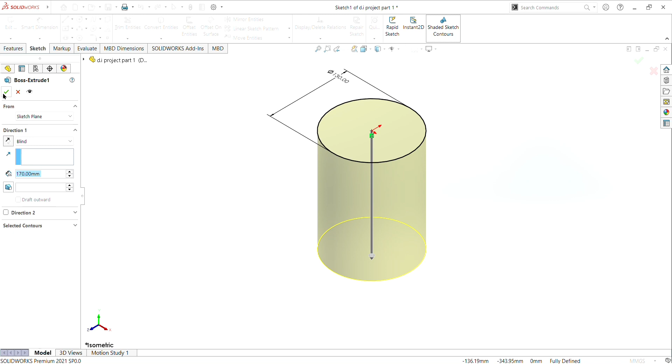So right now I'll be showing you how I made the first part of my project. So here, first I start with a sketch of a circle with a diameter of 130, and then I extrude boss, which I can show you here. Extrude boss to 170 mm, reverse, so that it will extrude boss downwards instead of upwards. The reason I did this is because I want it to be easier for me to make the shape of the cover. So basically, that's how I made the foundation.

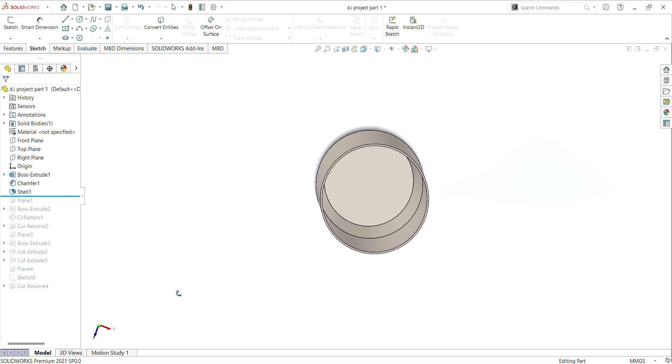After that, I chamfer it here. I chamfer it distance to distance: the first distance is 10 millimeter and the second is 40 millimeter. You can see it here. I chamfer it at the bottom instead of the top, so it will be like this. After that, nothing complicated. I move to shell, so I can make it hollow. The reason I make it hollow is so that I can insert other components inside here.

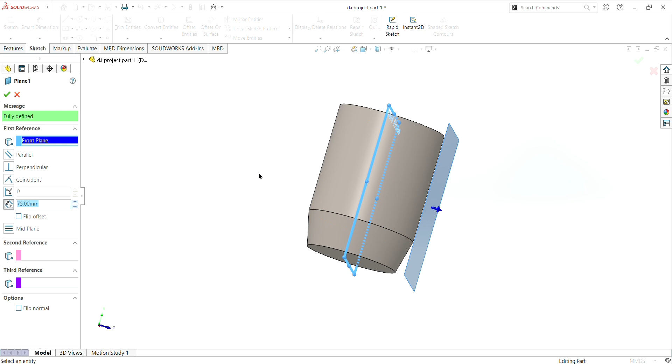After that, I make a plane which is 75 millimeter from my part, so I can make a component up here so it can be attached here. So here, what I did is from the plane that I picked just now, I extrude boss.

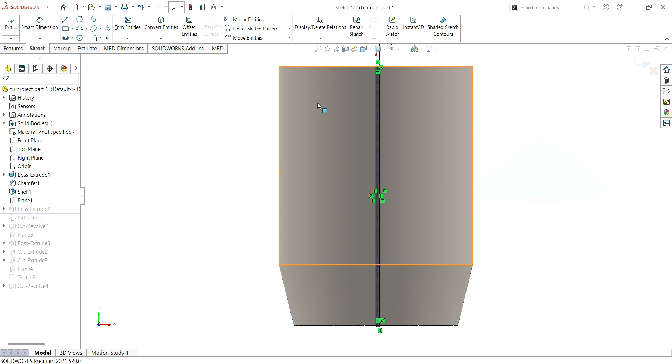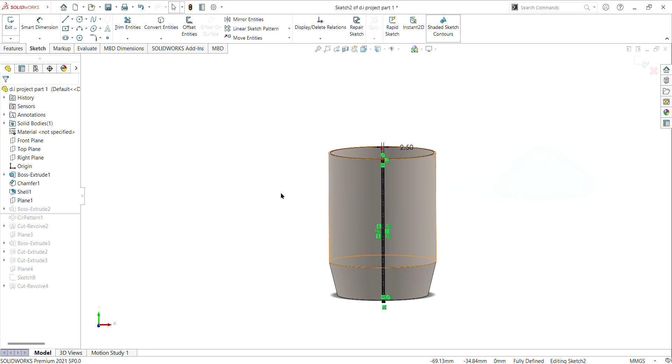I made a sketch here, which is 2.5 millimeter in length, and here, as you can see, I made a center line. From this center line, I can make it symmetrical so that it is equal from side to side. Then from this sketch, I can extrude boss it to make the fins.

Yeah, the fins. So from the fins here, I made it reverse and up to next, so that it extrudes boss downwards and it will not exceed my cover body. So it will just stop there. See? So this is the first fin, or the foundation of the fin.

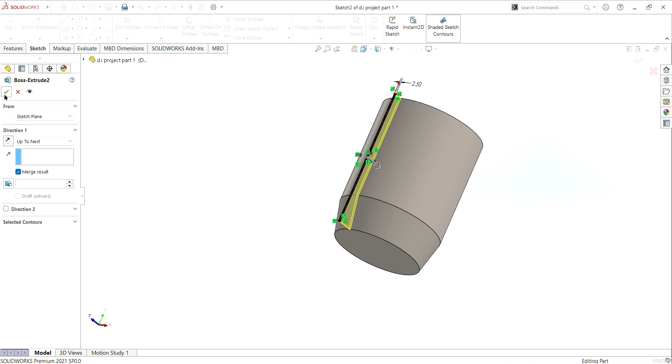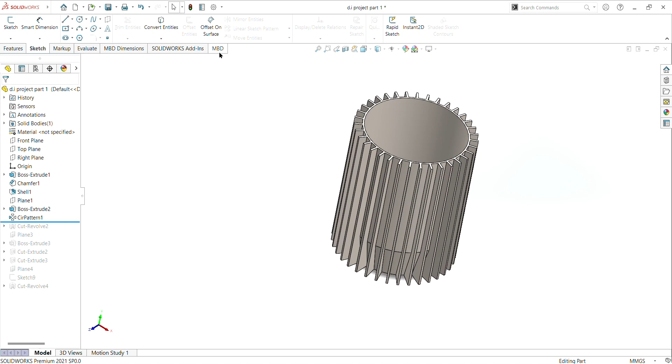As we all know, on an AC motor cover, the fins cover all of it. So how do I cover it? I use the circular pattern function here. Here I pick the face, which is my first sketch just now. Pick 360 degree, which means it will cover all of my outside cover. And the number 35 here is the number of fins covering my cover.

So from this pattern function, I can make my fins cover my cover in a circular pattern, since my AC motor cover is in a circular shape.

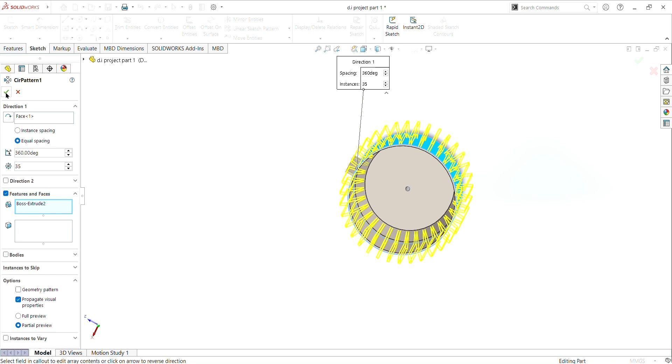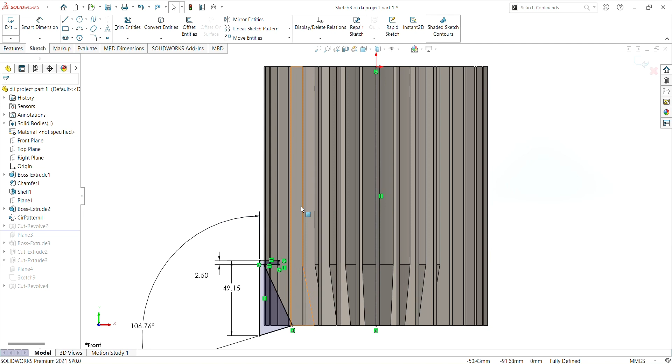After circular pattern, here, what I did is, as you can see here, it has a little bit of space here. So from this cut revolve here, I made a sketch at the bottom so that I can use this sketch to make a cut for the space that I want.

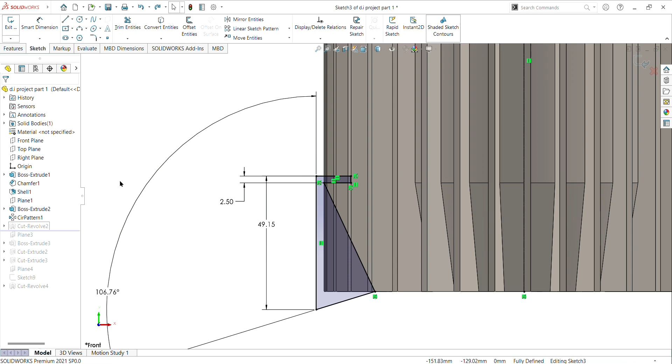I do not choose extrude cut, since extrude cut will only cut across, but I want it to be cut around my cover, so I choose revolve cut, where the cut will revolve around my object. So I choose the sketch, and obviously it will cut revolving around my object here.

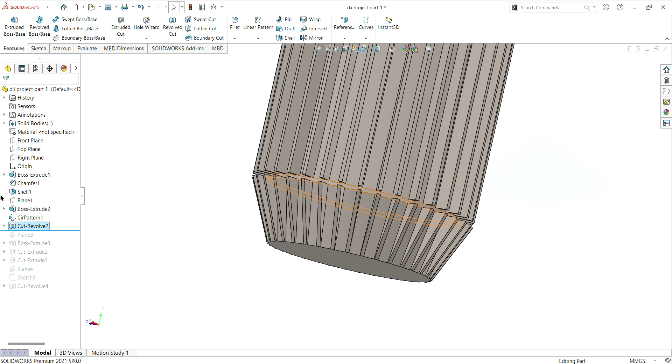After it has been done, uniquely, before this our fin, as you can see here, was straight in shape, but after we use the cut revolve function, it is perfectly shaped into a triangle, or we can say a right angle triangle. Perfectly shaped right angle triangle, with the perfect space that we want to shape the AC motor.

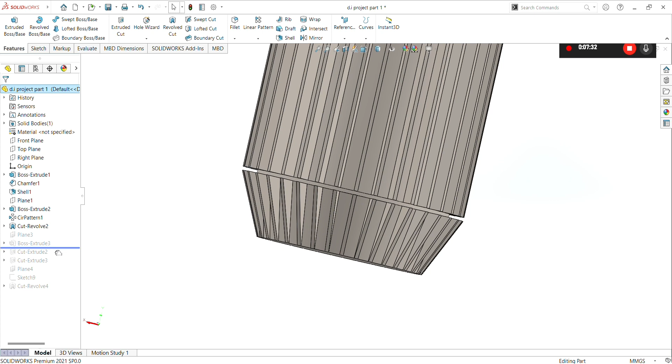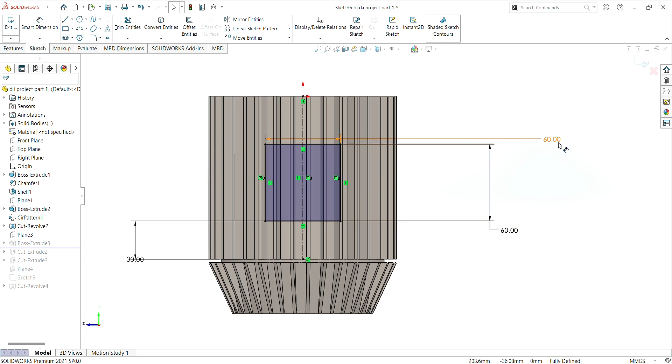After that, I move to this plane. I choose right plane, 100 millimeter, which is 10 cm from the origin, so that, same as the fin, I can make an object to be attached to the cover. Then here, boss extrude. As you can see, I sketch a square which is symmetrical with my cover. I made a center line so that it can be symmetrical. The square size is 60 mm by 60 mm.

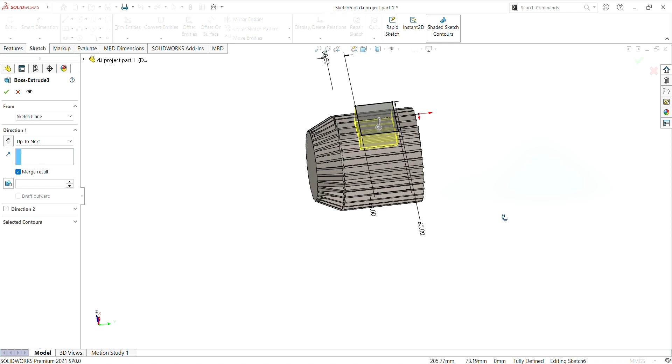Then from this square, I extrude boss it to make a box here. And same as just now, I extrude boss it reverse and up to next, so that it will be attached to this cover. See, it is attached here. After I extrude boss it, it becomes a perfectly attached box, where usually we can put an insulator so it can be tested when we do a test.

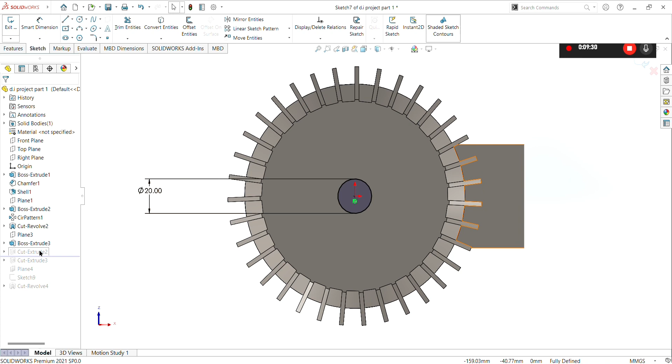So after I make a box, I extrude cut a hole here. The reason I extrude cut a hole here is to attach the motor in the next part. It's just a simple extrude cut to make a simple hole, and here another extrude cut to make a hole in this box. Just a simple extrude cut. Yeah, I extrude cut, sorry for the delay.

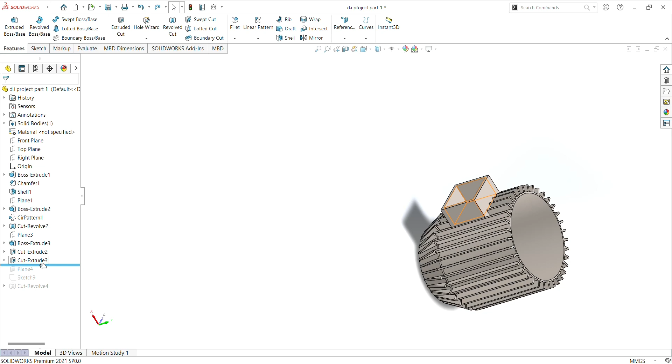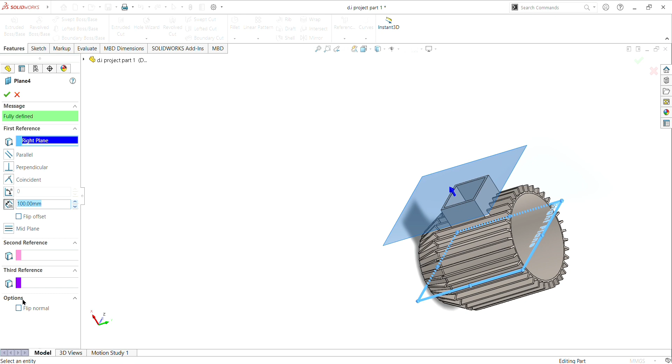Okay, after I extrude cut to make the hole, again I make a plane on top of the box. This plane, which is also a right plane and 100mm from the origin.

Here I made a sketch here, as you can see. Oh no, I'm sorry. Here, yeah, here. Here I made, as you can see here, I made a sketch here. I guess this plane is a bit of a blunder, sorry. Okay, in this, I choose right plane and made a sketch here, as you can see.

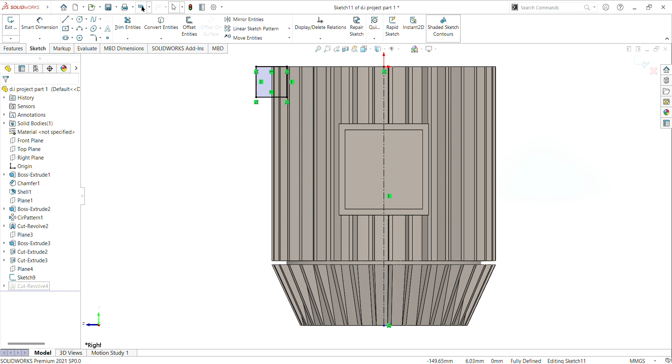This sketch here is 20mm and 20mm in length. I don't specify the width, I guess, because this sketch is for me to revolve cut, just like just now. I want the cut to be revolving around my cover. As you can see here.

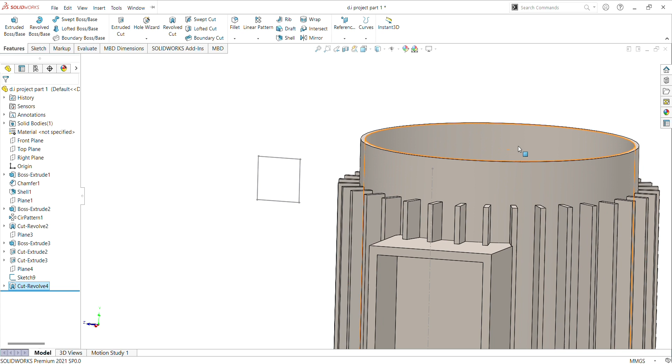The reason I did this is because it acts as a space for me to attach my back cover at this motor to complete the full body of the AC motor. So I guess that's all for the first part. So let's move on to the second part.

Okay. Alright, so this is my second part for my project. As you can see here, this is my back cover for my AC motor. So let me walk you through this. First, I sketch a circle with a diameter of 150. After I sketch it, I extrude boss it 85mm in height. I don't do it in reverse or anything, just a simple extrude boss.

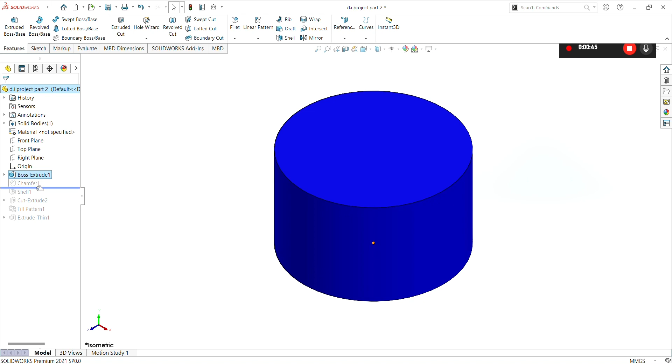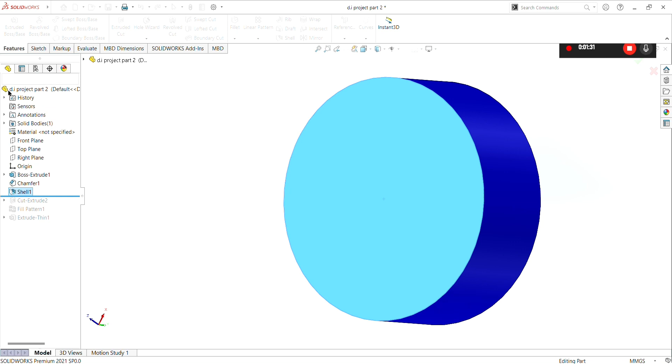After I extrude boss it, I move to chamfer. I chamfer it at the top, distance to distance, the first distance is 20mm and the second distance is 25mm. After I made my chamfer, I move to shell. I made a shell at the bottom of my cover so that it can be hollow, and as it is hollow, I can attach it to my body cover, and this is my back cover.

After I make it hollow, I make an extrude cut here, which is a simple square, 5mm in length and 5mm in width. This is the foundation for me to make a fill pattern. I made it first at the center. I made my sketch and I extrude cut it. See, I extrude cut it up through all just to be safe, so that it is hollow until the end.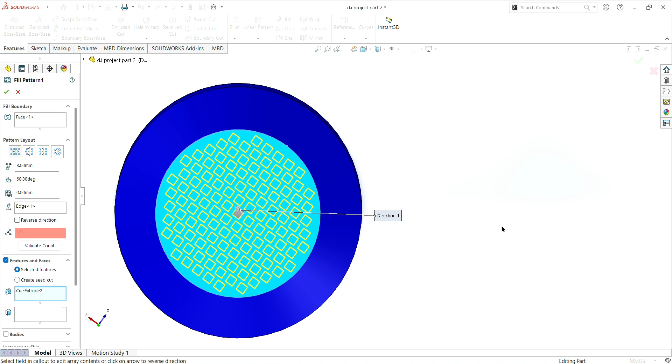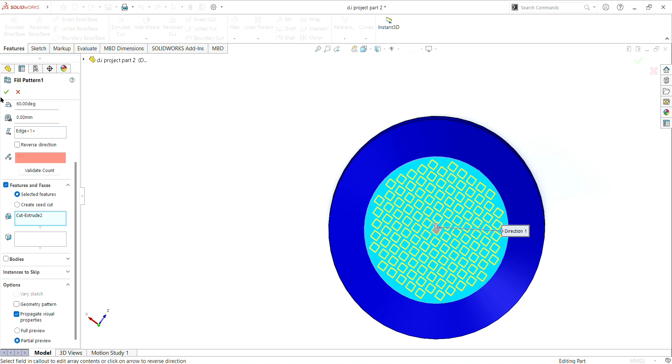Okay, after I cut it, I move to fill pattern. The reason I did it is because I want the square to fill every space here. I chamfer here, right? So the circle here, I want the square to be filled at this space. So I made it 60 degree, 8 millimeter and 60 degree, so the square can fill the back cover. So after I made it, it looked like this.

After I fill pattern, I made a sketch here. The reason I did a sketch here, 130 millimeter, is for me to extrude cut it. See, I extrude cut it, but I extrude cut it reverse and up to next. So I have a little bit of space here.

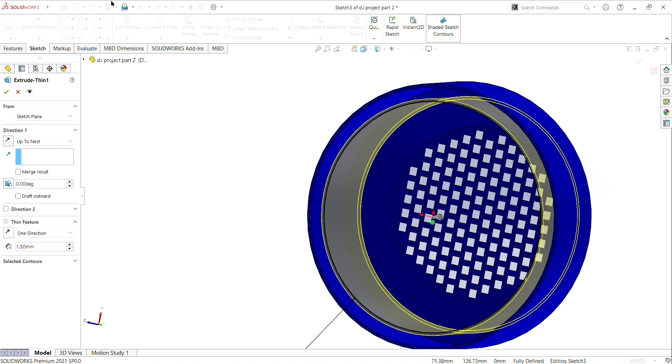My size just now is 150, and the next circle sketch is 130, and I extrude cut it reverse so that I can have a little bit of space here, which is 20 millimeter. This space is so that I can attach my back cover to my body cover. So that's all for my second part. Thank you. So let's move to the third part.

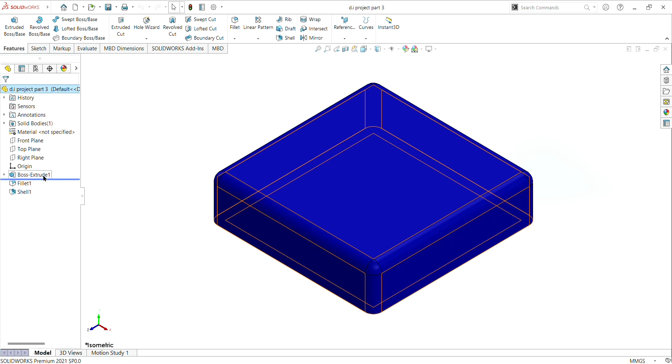So right now, let's move to the third part. There's nothing complicated here. It's a very simple square. It is the cover at my body where we attach the insulator. So here, as you can see, first I made a simple square, 60 millimeter in length and 60 millimeter in width.

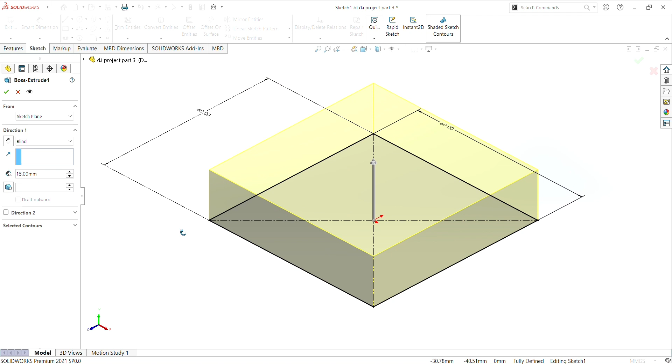After I made the sketch, I move to boss extrude to make it 3D here. So extrude boss 15 millimeter. See here. After extrude boss it for 15 millimeter, I make a fillet.

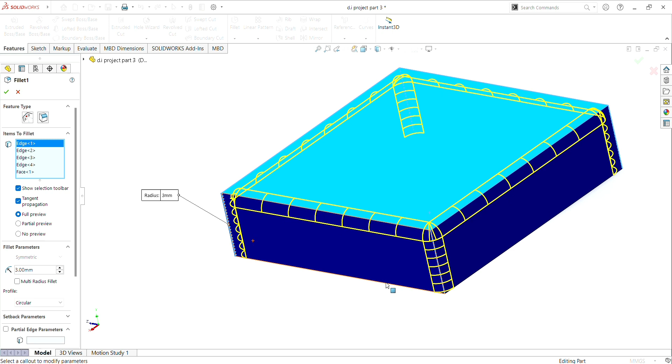For this fillet, I pick every edge here. First edge, second edge, third edge, and fourth edge. After I pick that, I pick every single edge here. 1, 2, 3, 4. But at the bottom, I don't pick any edge. On the top and the side only, I fillet it to 3 millimeter. Oh sorry, 3 millimeter and nothing more, so that it can be like this.

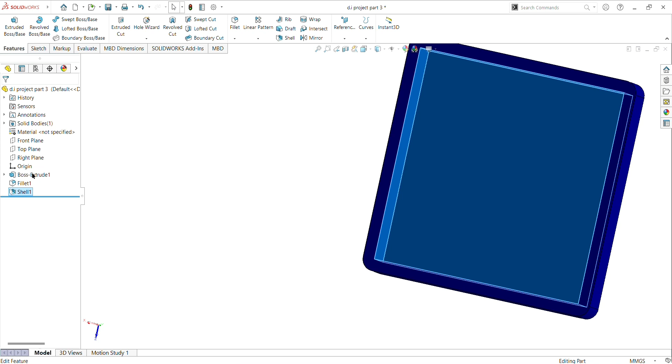After I made my 3 millimeter fillet, I move to shell so it can be hollow. The reason I made it hollow is so that I can make it as my cover. See here, I made shell for 3 millimeter, so it covers all of it. So yeah, that is everything about my third part. So let's move to the fourth part.

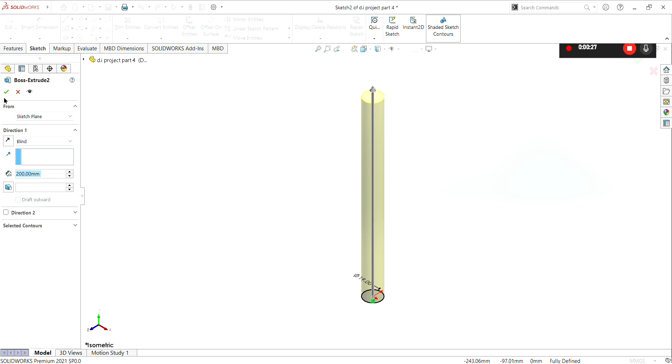I made a second cylinder here. Yeah, here I made a new plane. No, I pick a circle here. I sketch a circle here. Then I make it a little bit bigger than just now. Just now is 19mm in diameter. Right now I make 60mm in diameter. After I sketch that circle, I extrude boss it.

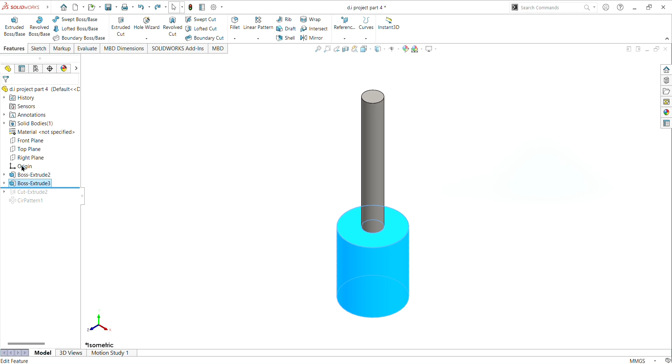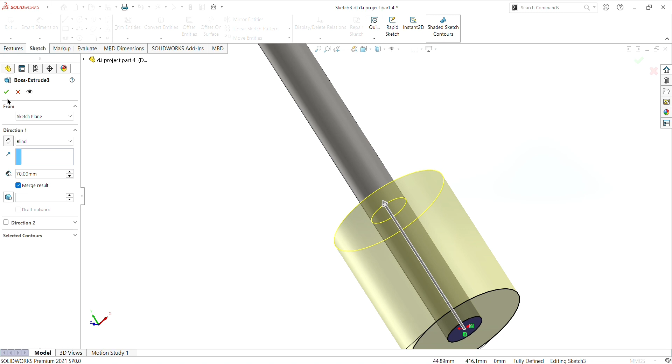And here's, I could say, the fun part. I extrude boss it reverse, so instead of extruding downwards, it will be upwards here and cover the small cylinder from just now. So it will look like the small part is at the top, and the thicker part is at the bottom.

Okay, after what I did here, I made a sketch here. It is basically a simple sketch. The reason why I did this sketch is because I want to cut it and make it the shape of the motor, or the set of the motor brush, I would say like that. So here I made a simple sketch, just a very simple sketch, nothing to be exact. The parameters are not complicated, just simple numbers.

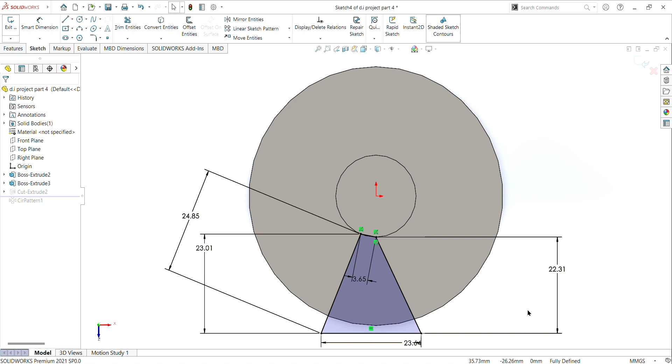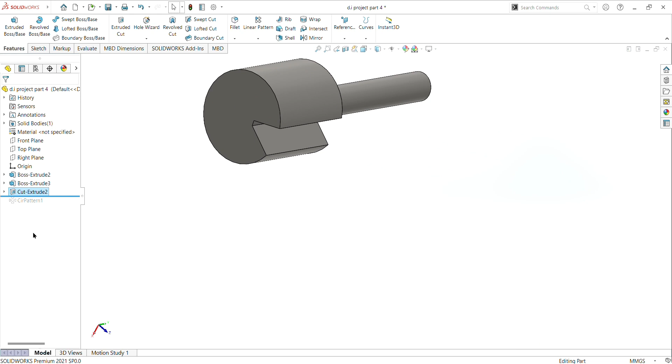I put there. After I sketch that shape, I immediately extrude cut it, as you can see here. Extrude cut it through all, not reverse or anything, just through all. After I extrude cut it, I use the circular pattern function, so I can copy my extrude cut here. So I pick 360 degrees, which will cover everything, and I put the number 3 here, so that there will be 3 patterns on my object. So here 1, 2, 3. So I can get the 3 patterns that I want.

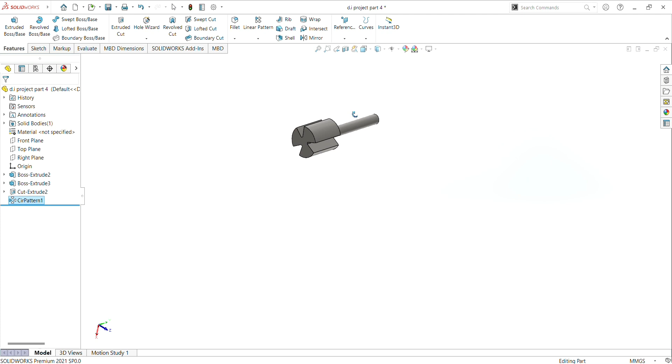So this will be my, I'm sorry, it's not my motor, it's my stator. Yeah, this will be my stator, which I will put in my body cover. So that is all for the fourth part. So let us move to the fifth part.

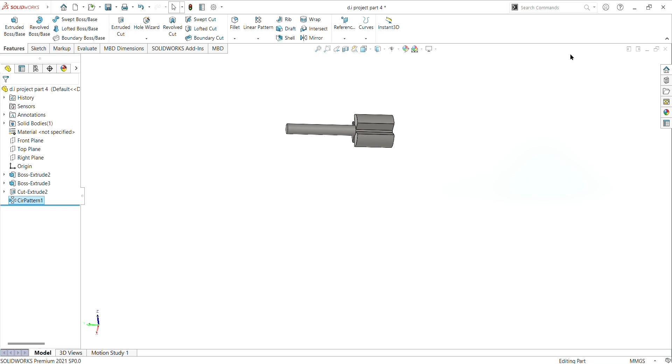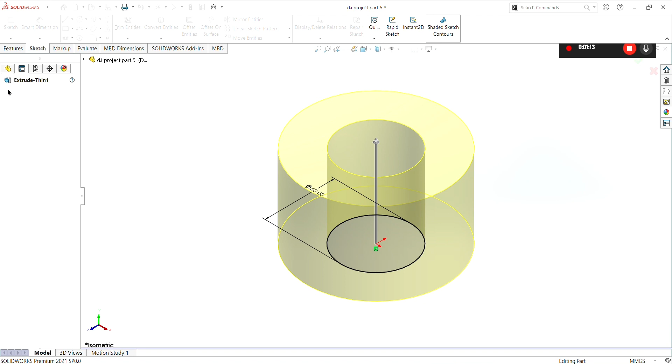And the reason for this is because here I picked the material for this part as brushed copper. I want to simply pick a color for it. I want it to mean something. So I pick the material for this part as brushed copper. So that is all for this part. Right now I will move to the sixth part, which is my last part. Then we will move to the assembly.

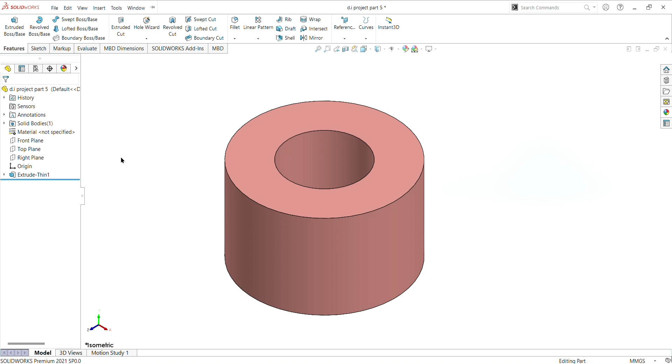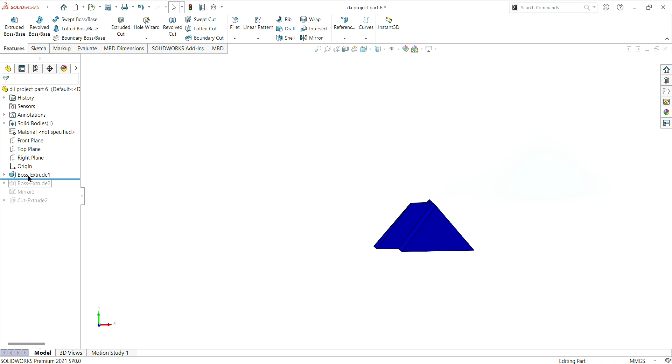So okay, this is my last part, the sixth part. What am I doing right now? This is the stand, my AC motor stand. So let me show you how I do it. First, I sketch what we can call a prism. We can say like that. So how I sketch it here is just a combination of rectangle and rectangle. The first rectangle here and the second rectangle here, form this shape, as you can see here.

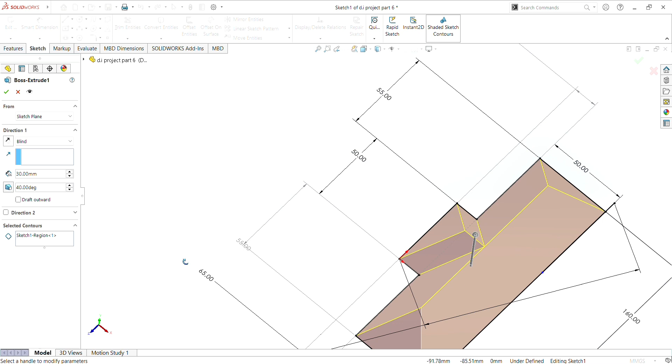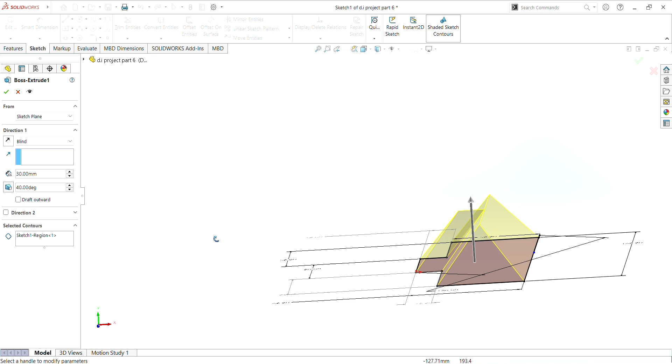After I sketch this, I extrude boss it. And how did I get this prism shape? I make it 40° here. I extrude boss it in 30mm, and for the angle, I make it 40° here. So with this 40°, my sketch will be, I could say, a rectangular prism. It is shaped like a rectangle, but it is not really a rectangle. It's okay.

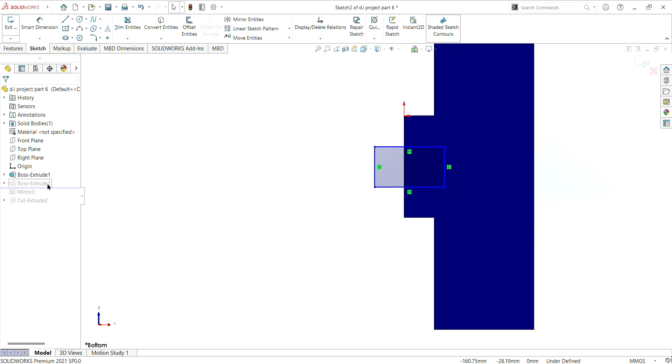So okay, let's move to the second thing I do. So here I sketch a little bit of attachment here. So let's see. Here I made a rectangle, just a simple rectangle. And after I made a rectangle, I extrude boss it.

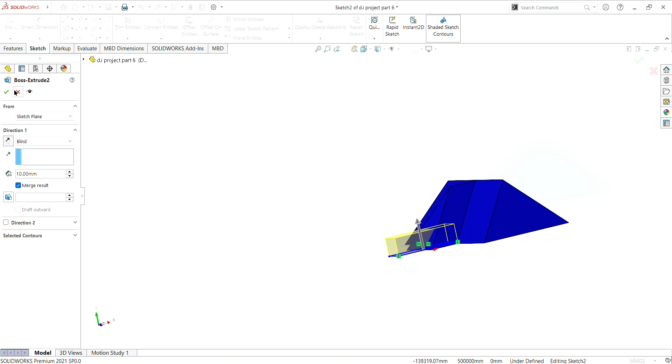Blind, so that it can also go through here, blind, and extrude boss it for 10mm. It will look like this. See here, this is why we use blind, so we can get this shape, and also it can go through. It doesn't look hideous. I will say that it doesn't look hideous at all. That's why we use the blind feature.

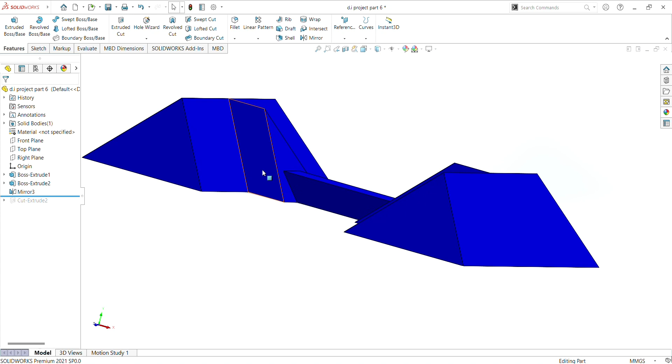After that I mirror. The reason why I use mirror is because mirror is very useful to make the same part. We want to do the same part, but we don't want to waste our time. So I use mirror. How did I use mirror? Here, I pick this face, then I simply mirror it from this plane. I simply just click that, and it is mirrored. So I can get exactly the same shape that I did first.

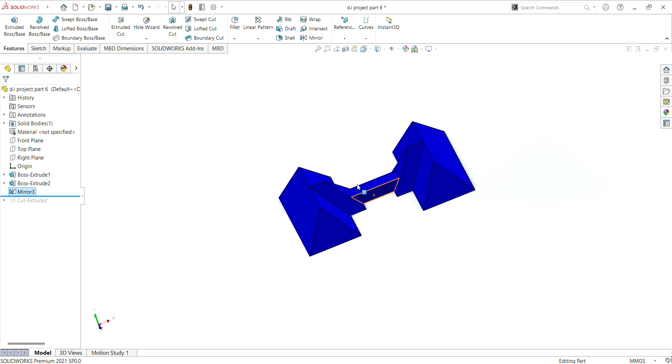So then I get two and it is automatically attached, and my stand is complete. So here, as it is attached completely, I can say that my stand is complete, but it is not complete. The last part that we do is a cut extrude here.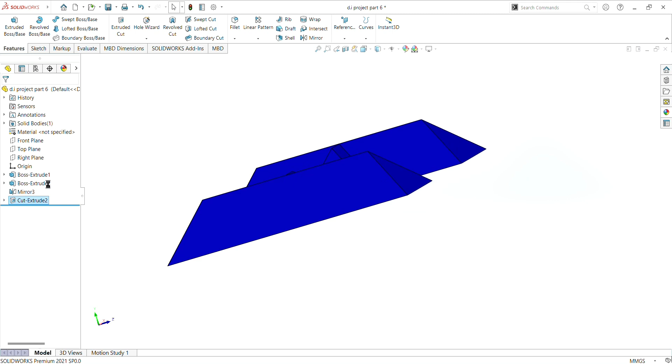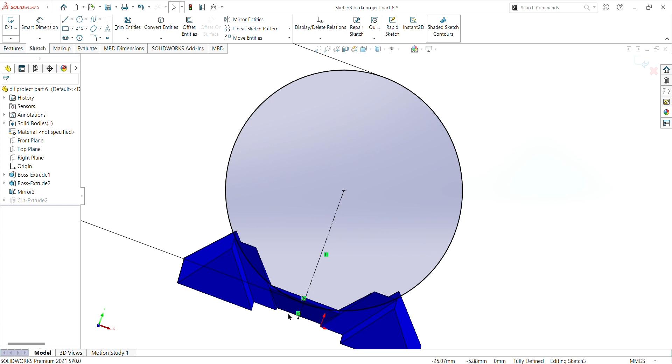For the cut extrude here, I made a big circle. The reason I did that is because I want to cut it here at this part and at this part, but I want it to be cut equally. I don't want it to have any mistakes there, with an equal angle. So I made a circle, with a center line here, and I made this center line the axis for my circle, which is 150 millimeters.

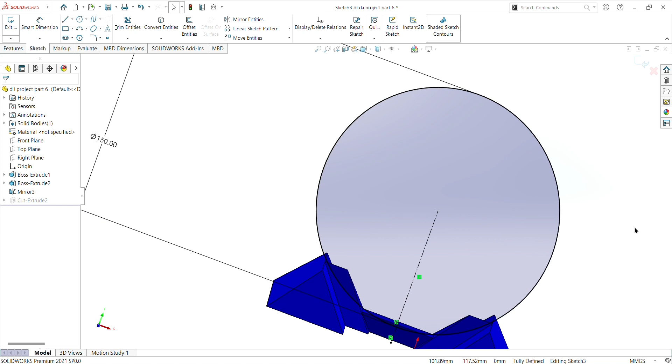150 millimeters here is basically the size of my cover. So by using the diameter, I would say this is the early projection of my body cover to put on my stand here. So from this early projection, we can see that it must be cut here and here.

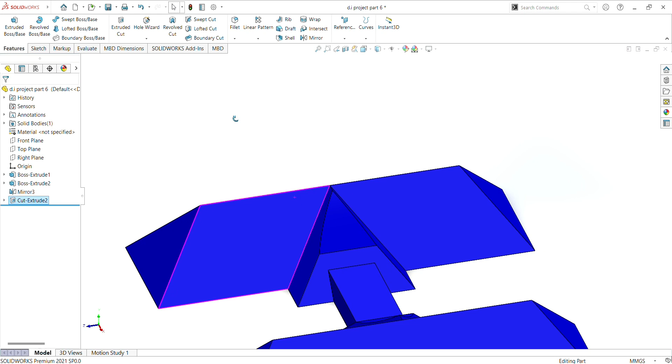So after I sketch this, as you can see, I use the extrude cut function to cut it through mid plane. So it will be cut front and back. Everything will be cut so that my cover and my AC motor will fit perfectly. After we cut here, you can see the final result of the cut and the final result of my stand. So that is all for the 6th part. So all of my parts are complete.

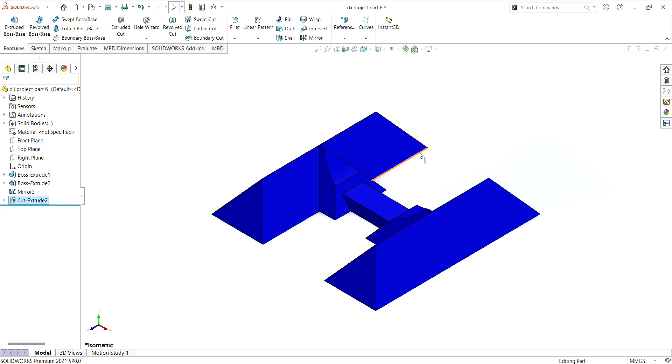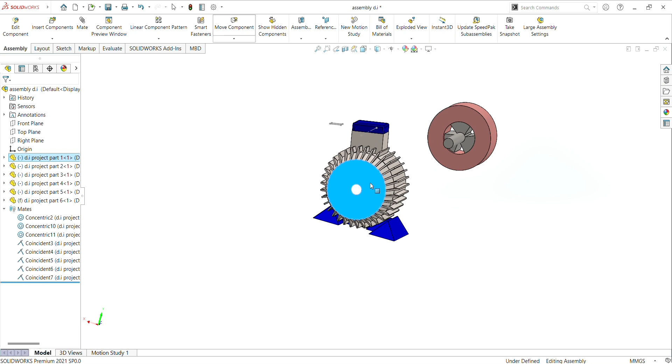So right now, let's move to the last part, which is the assembly. I will show you how I attach everything. My first mate is concentric. I mated the face inside of my body cover to my stand here. So I can perfectly just put it around there, like that. Adjust it a little bit. So it can be perfectly stationed there on my stand.

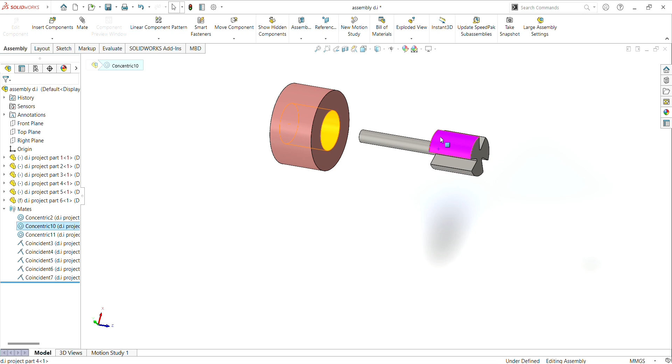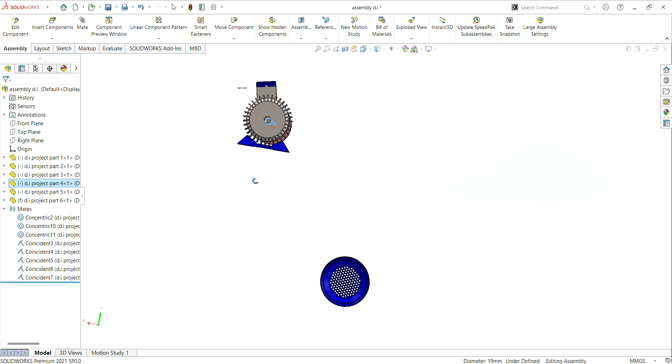So let's move to the motor part inside here. I attach the second mate here. I attach the face inside this to the face on this part. So you can see here it can be perfectly placed there. The third mate is my motor with the hole that I made earlier here. So let me adjust this a little bit.

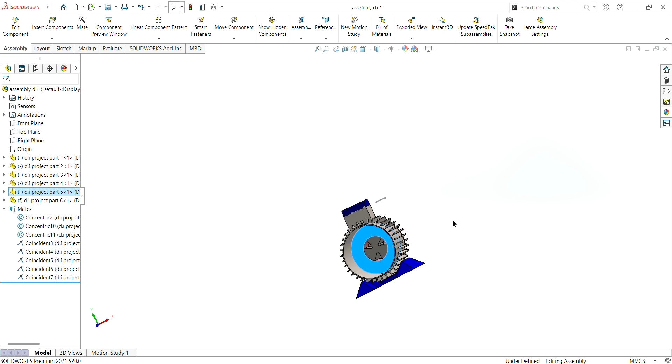The center. Let's push here. So as long as the thing can be entered. So right now let's put our stator as it has been made. It will always follow the motor. See, it will not go anywhere else. So let's put this a little bit to the back. See how it perfectly stays there.

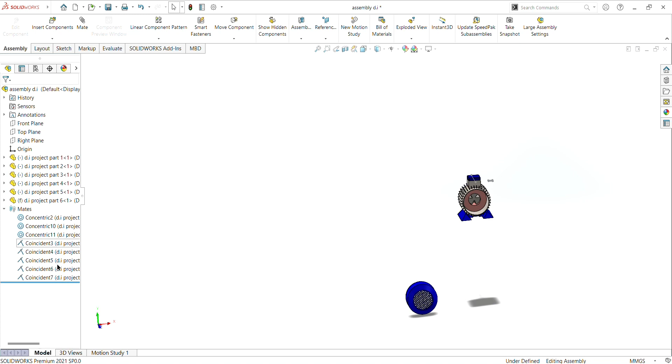As you can see here, this cover is perfectly stationed here because of what? I mated every single thing here. This cover I mated with every face here: 1, 2, 3, 4, 5. And then for the last thing, I mated my back cover to the face that we made when we drew the sketch.

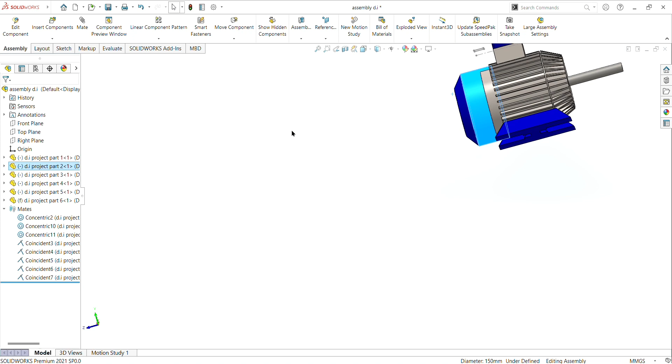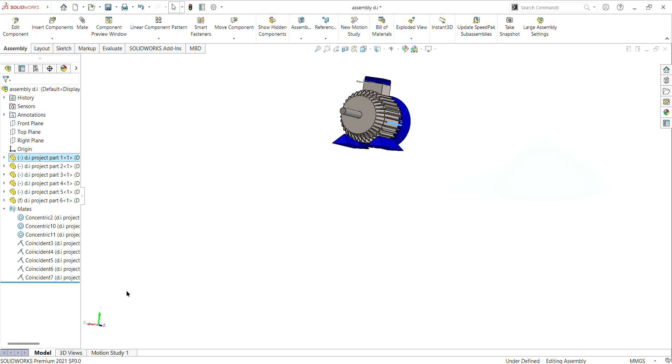And that is how I did my assembly. So from the assembly, you can see the exploded view of it. Let me walk you through this. So I guess that's everything from my video.